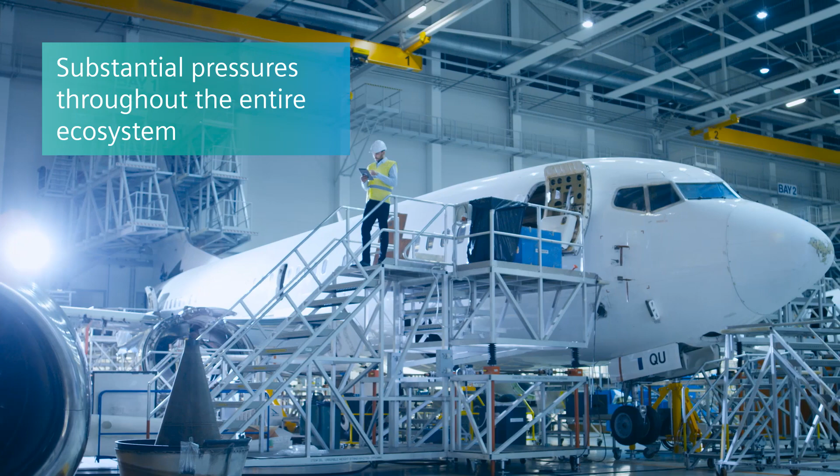Retaining program profitability is a significant challenge today, and there are a lot of competitive pressures. We see substantial pressure on margins coming from industry players throughout the ecosystem. We're all trying to achieve cost control, both in our development programs and in our manufacturing efforts. This also includes getting quality right the first time.

As you may know, most of the work done in aerospace is on a program basis. We're always trying to balance the amount of innovation against the risk introduced into a program. The risks we face manifest as both cost and schedule overruns, and these impact the people responsible for those programs, individuals like the vice president of programs or the program managers running specific platform development activities.

From a technical perspective, there's always a set of commitments that we make. When these come under risk, they jeopardize the reputation of the company, because it's what we deliver technically that our customers are looking to acquire.

One of the things making this more difficult is the trend toward implementing platform functions electrically. What we've seen over the past 10 years or so is a major shift from implementing platform functionality using mechanical, hydraulic, and pneumatic approaches to electric.

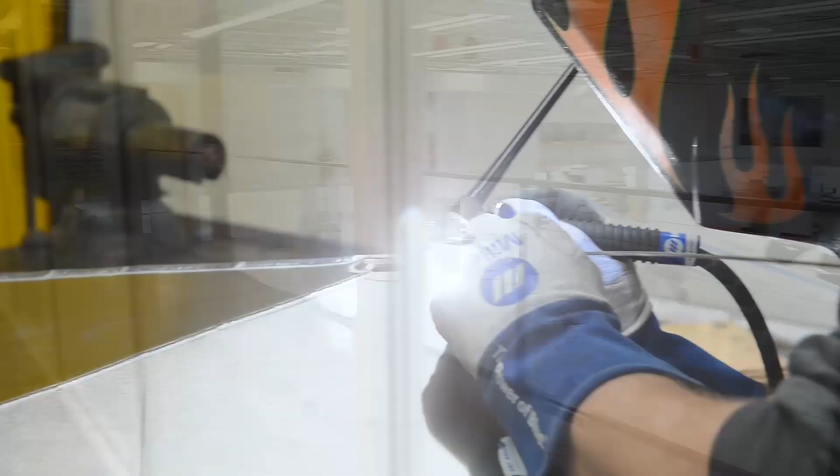An interesting example of this is a company called Boom Supersonic. In their supersonic aircraft, Boom is able to replace the canted nose of the Concorde with an electronic vision system that allows pilots to land without having to cant the nose forward. This is reducing the cost of supersonic transport, which might make it possible for people like us to actually fly in a supersonic jet someday.

Why is this happening? Well, we discovered that when you replace mechanical implementations with electrical, you increase the overall reliability of the platform and make it more maintainable. You also reduce the weight of the platform, which means you can transfer weight from infrastructure into payload, or trade it off for longer range or higher fuel efficiency.

This is extremely important because aircraft are limited in how long they can stay up in the air and what they can do while in flight. If you can replace aircraft infrastructure with mission systems, you can do a lot of interesting things. You can carry people further, take more cargo, and enable new approaches to the commercial air transport industry.

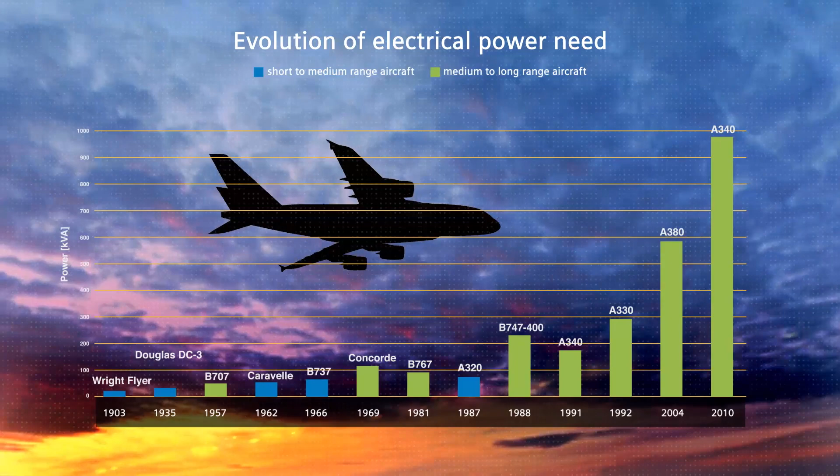How extensive is this shift to electrical? It turns out in the past 50 years, we've seen an increase in power generation on platforms by a factor of 10. This is extremely high, given that we haven't really changed the form factor or size of those platforms. The power density has gone way up.

As we increase the electronic content of the platform, we've also increased the complexity of the electrical system. At the same time, and this is key, we've continued to use design and integration approaches that were optimized for mechanical implementations. This is why digitalization is so important today.

What does it mean to digitalize? It means to make effective use of digital technology to improve overall work processes. But it goes beyond just digitizing the data and storing it electronically. It's more about creating useful models of a platform, its electrical system, and the information shared between different elements of the different mission and flight systems.

When we digitalize, we actually bring about virtual design and virtual systems integration that allows us to do things like model-based systems engineering, model-based design, model-based manufacturing, and model-based sustaining.

The three key tenets of the model-based enterprise are digitalization, automation, and data reuse. In digitalization, we use digital models as the authoritative source of information shared across the entire development and manufacturing value chain. In automation, we use software algorithms to transform these models into correct-by-construction forms that help drive the next stage in the value chain. Finally, what is data reuse?

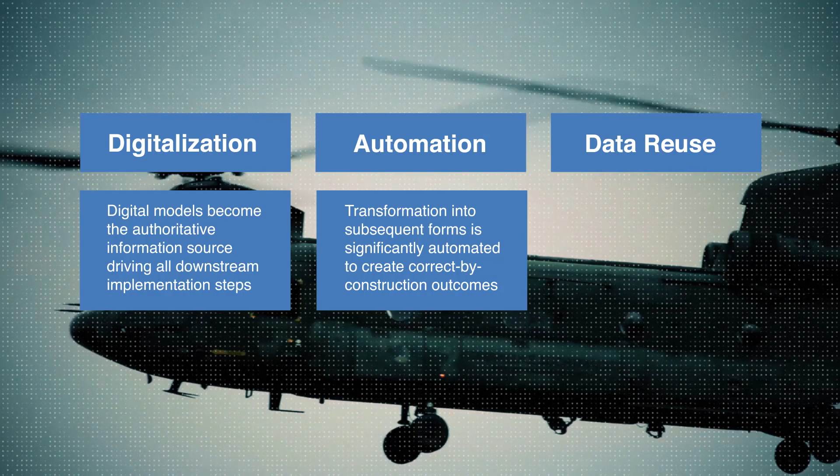It's the ability to take data that we've put into our digital model and the electronics that are part of it, and use it in subsequent stages of the value chain. One of the big advantages of data reuse is that we eliminate errors associated with manual reentry or incorrect data migration from one stage to another. The errors that arise here are quite significant and are often a deep source of the elements that go wrong, becoming drivers of program execution risk.

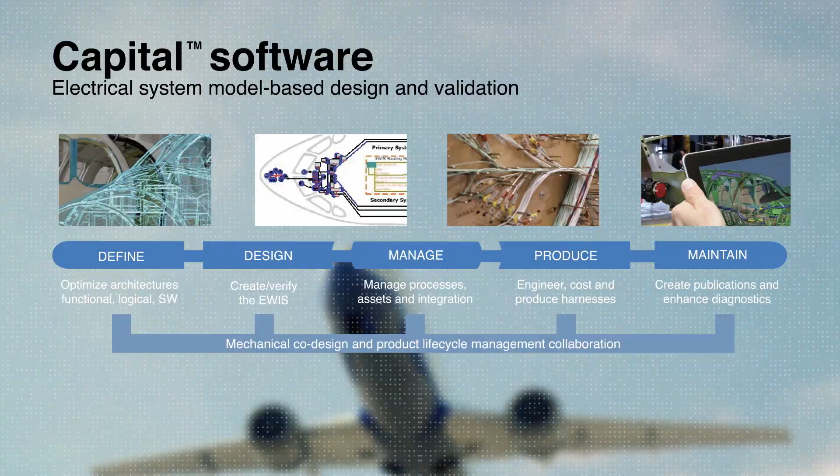In response to this, we've developed the Capital suite of systems design and integration tools. Capital implements the electrical model-based enterprise. It is a mature environment. We've spent thousands of man-hours and over 20 years to get this right, and it's architected to exploit digital data continuity, which allows us to build a comprehensive digital twin of the product, production, and its operation, then connect that twin across the value chain by a comprehensive digital thread. This lets you perform activities seamlessly from the definition stage, through design, into manufacturing, and then through sustainment and maintenance of the overall aircraft electrical system.

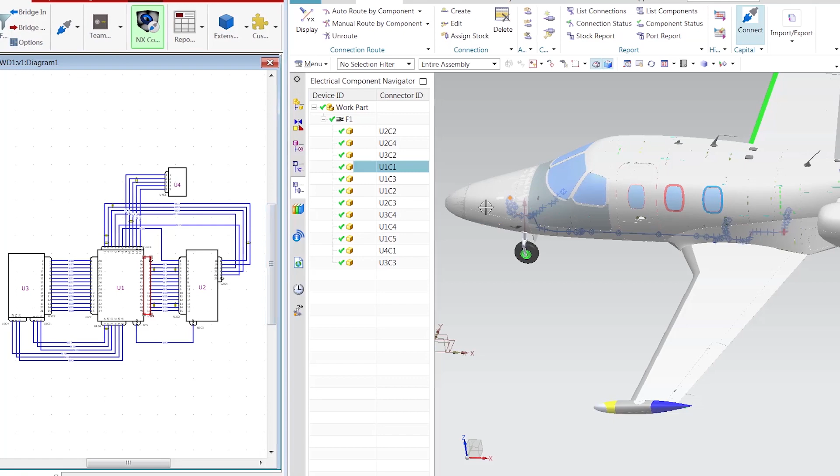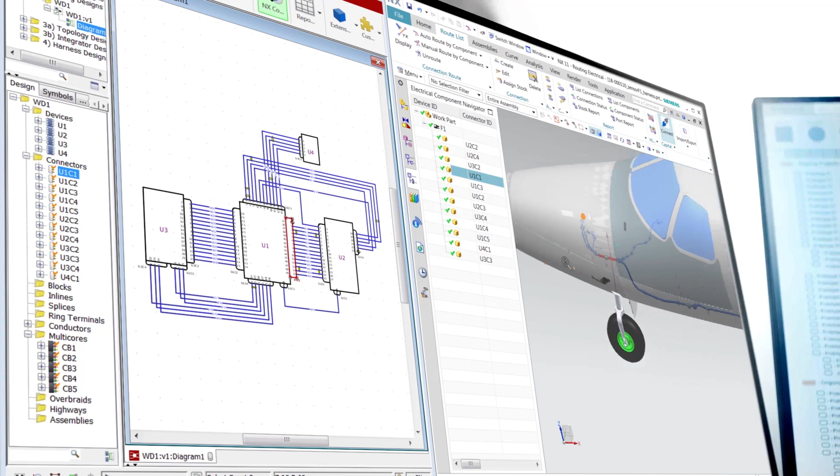We've also recognized the need to work with other disciplines as the design of the electrical system progresses. We've enabled Capital to work closely with mechanical CAD environments and integrate with popular product lifecycle management tools. Tight integration between the electrical and mechanical design environments allows our people to work together quickly and in real time. This means they can pass off revision-controlled versions of their work to their counterpart, so everyone knows who just received the right data and who's up next. This reduces program risk because there are fewer errors. These two folks converge on their ultimate solution more quickly, and in a way that results in a systems platform that is easier to build.

What are the business and operational benefits of using Capital? Of course, there are significant reductions in cost, but I think what's more important is that we extract program risk from our work. What do I mean by that?

One of our customers has been able to reduce the number of changes found during systems integration by a factor of 10. If we think about how programs go wrong, it's often associated with finding changes at a late stage of the integration phase. This group was designing a flight simulator. They were able to reduce those changes by 90%. That's a huge amount of risk buy-down from just having accurate information passed from one design stage to the next.

In a second example, one of our customers designed a space capsule from scratch using Capital. They designed its entire electrical system, from capturing the logic, to specifying the interconnect, to detailing the harnesses. When the harnesses were received from manufacturing, they installed them in their prototype capsule. They hooked everything up, and it all fit—first time. When they turned it on, it worked—first time.

No question, the advantages of adopting Capital for electrical system design are starting to be recognized throughout the industry. In fact, just recently, Boeing invited Siemens to participate in its second century process improvement program. This involved rolling Capital out across the entire Boeing enterprise. What attracted Boeing to Capital was the ability to do electrical system design using a comprehensive digital thread connecting the entire value chain. This reduced significant numbers of errors and allowed Boeing to actually connect design to systems engineering. Not only did this reduce Boeing's costs, but they now live in an environment of reduced risk. They can actually be more innovative when they propose new solutions to their customers.